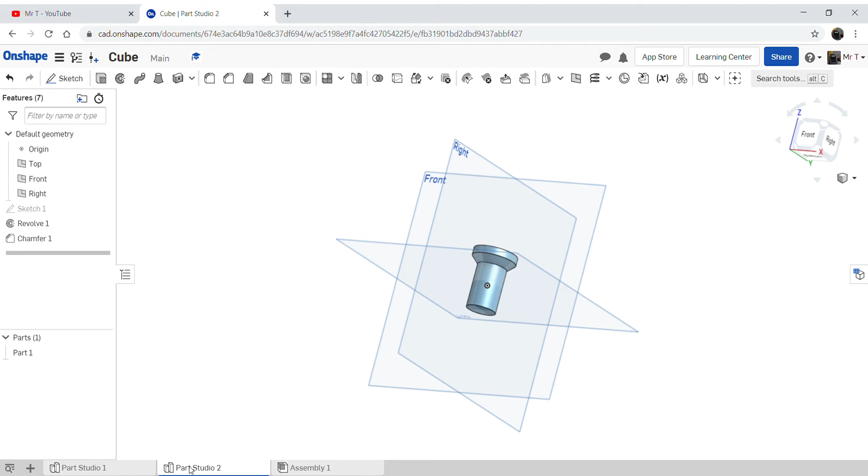So here we are for part 4 of our tutorial to make our slightly weird shape, but nevertheless it's going to be useful in terms of you learning how to put things together. Last time we made our lovely infill section. We started off with a nice sketch. We then revolved it around an axis and then chamfered it to make it look nice and profesh. We've already done our part 1, so we've already seen that, and got our lovely bosses on the side and all that kind of stuff.

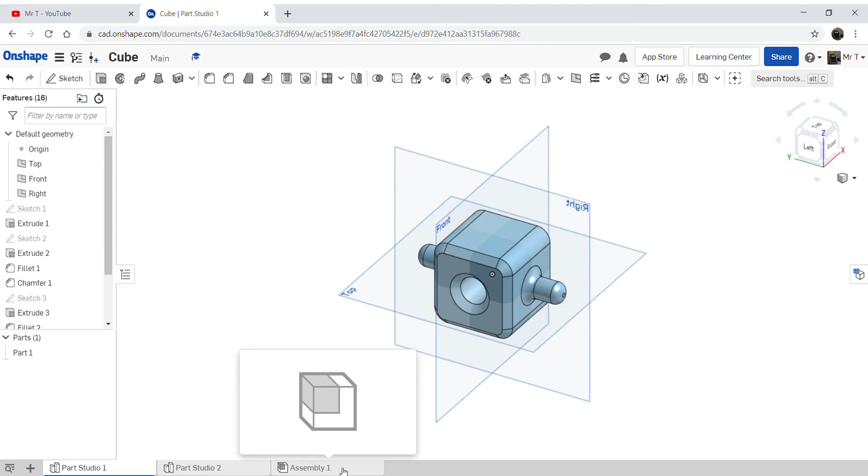Now, we need to combine the two things. Obviously they're in separate part studios at the moment, so that's not very helpful, but that is our drawing and our modelling out of the way, and the last thing we're going to do is to start to assemble those together. So we're going to come down to the bottom where it says assembly 1, and it's creating a new kind of environment for you once again.

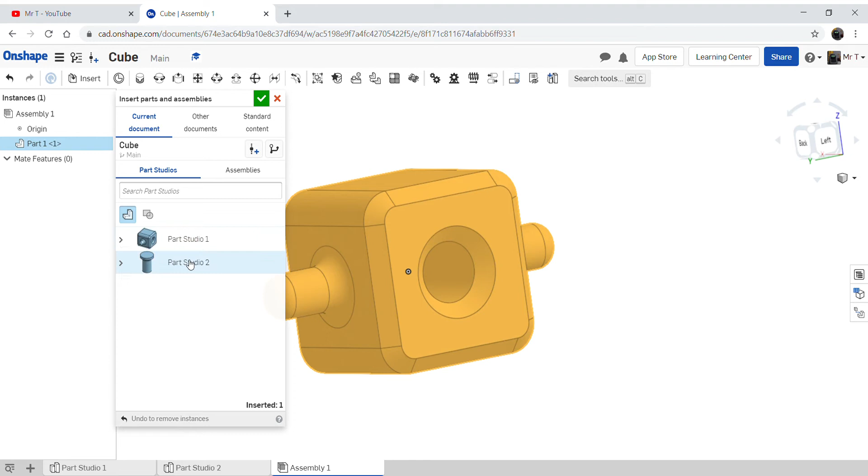Now we need to insert both of those parts, so we're going to go to insert, and we're just going to very quickly click on Part Studio 1. That will bring that in, and then we're going to click on Part Studio 2. Now, because of my insistence for the symmetry and all that kind of stuff, that's made it a little bit weird to insert our two parts into here.

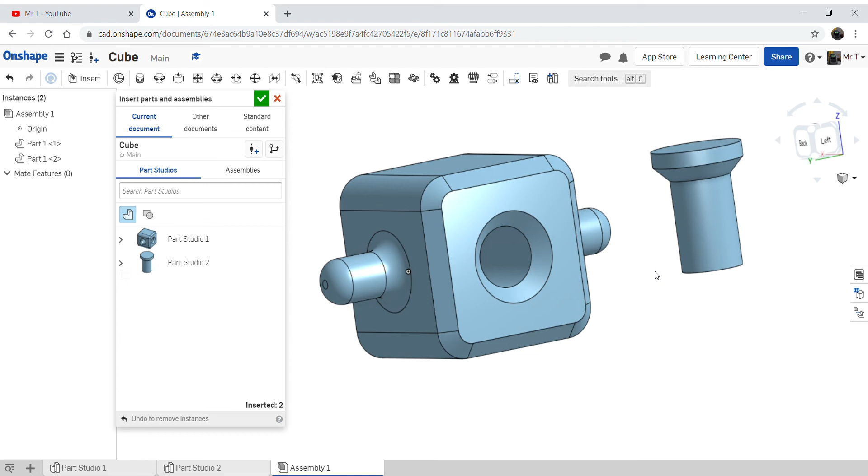Now, if I go around, you can select all the different bits and bobs that we've made, including that particular part. At the moment, that's not in a brilliant place. So what we need to do is actually drag that out of our other shape. Okay, so that gets us like that. The next thing we need to do is start putting them together. So we're just going to accept that we've got the two parts that we want, that part and that part, and then we need to start assembling them.

So to begin with, we're going to use what we call a slider mate. Now these are all mate tools up here, not mates like you're all missing at school, but these are all ways of attaching things, we'll put it that way. Okay, so that's a slider mate. So we're going to select that one. Now what it's going to need to know is what we want to attach to what.

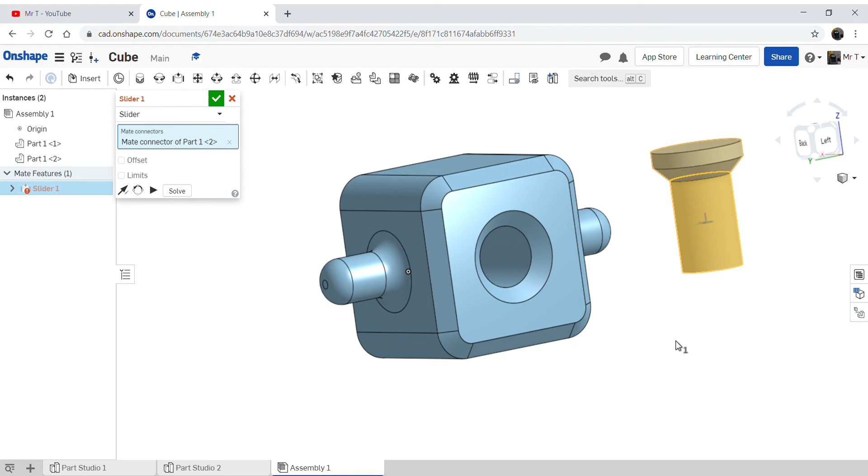Because it's a slider mate, this does not actually join in any way, shape or form. This allows us to be able to move a part around. So if you wanted something to start moving, reciprocating or something like that, you could potentially use this way of doing it. So we're just going to select this bottom cylinder part of it. Okay, so that's got that connected, and then we need to select what we want it to attach to.

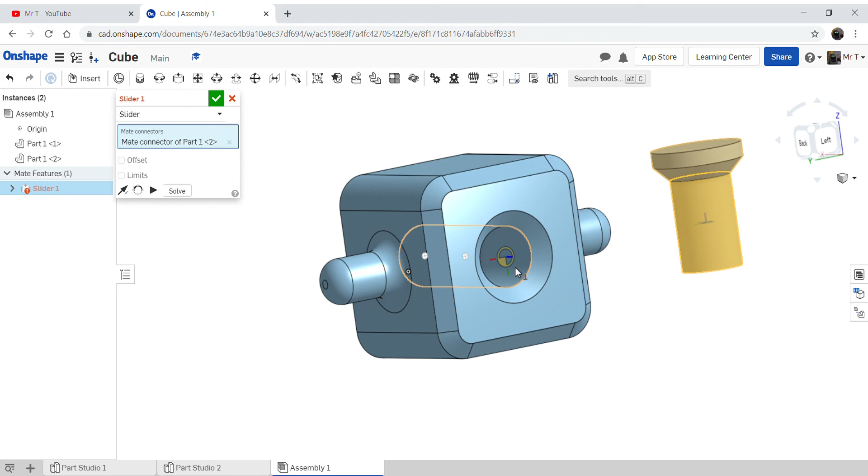So I need to go around, because you saw to begin with it selected this part. This is not right, because that's the bit that attaches to the chamfer. So I need to keep moving around. I might need to come off it and come back onto it, and it's this straight section in the middle that I want it to attach to. So I'm just going to click on that, and straight away that's going to go in there.

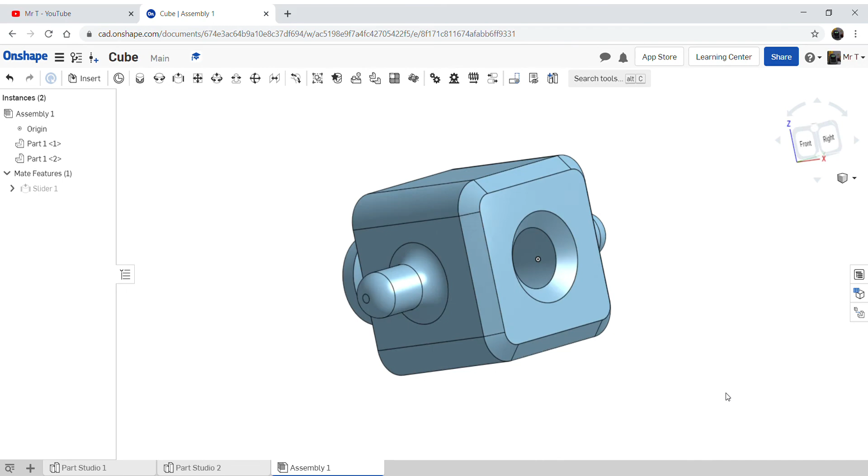Now it's not so sure about it, but I'm just telling it to solve it, so that's going to stay there. I can't OK it or anything like that, so I just need to get rid of that particular feature. Okay, so that now gives us one part that's slid inside the other, hence the mating part. Again, I'll let you make your own jokes.

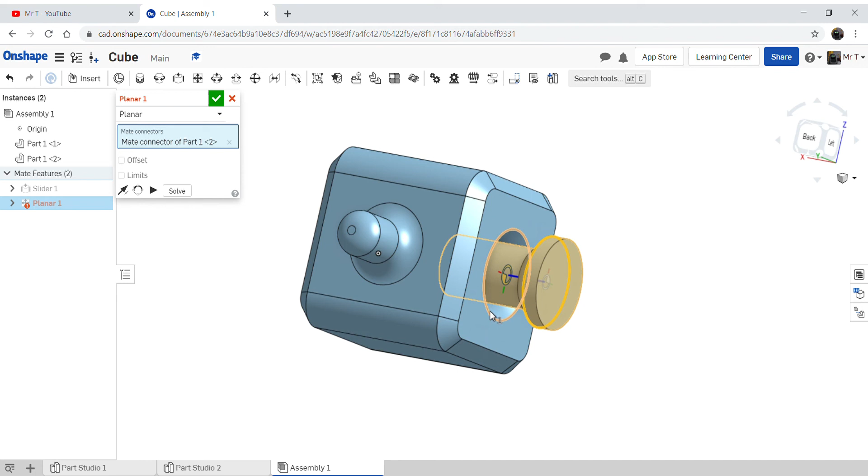And the last thing we want to do is a planar mate, so I'm just going to select that. Then I need to select the two lines that I want to join together. That's essentially what we're doing here. So this is the top edge of the chamfer, and I'm going to select that. And then I'm going to come down to here, and this is the top edge of that chamfer. And if I click the two, thank God that worked, especially when I'm doing a demo. Those two join together, and again I can't do anything with those because they've just been put together.

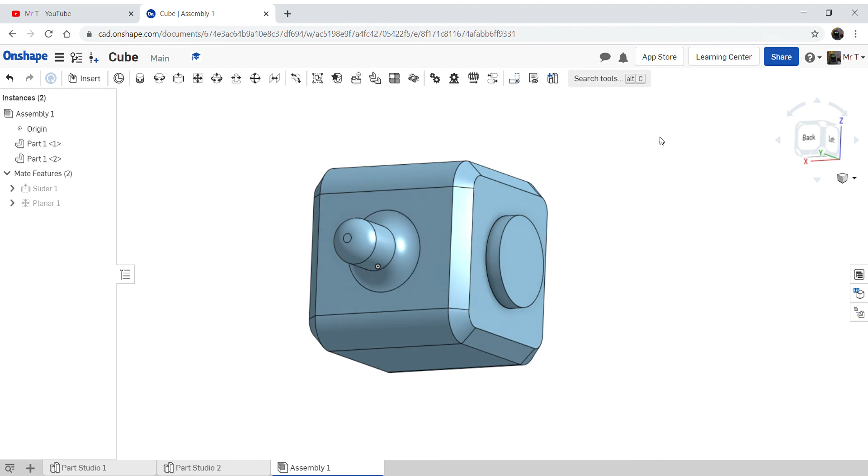So that is where we should end up. You can see from the other side, that's slid inside there, and that is nicely pushed down into that section quite nicely. Excuse me. So that is everything that we needed to do with this particular offering. I seem to have turned it up a very strange way, so I'll just put it back to where I'd like it to be, to show you what it should end up like. So that is our part 4, and those are our assembled parts.

If you can get yourselves to that stage, that is absolutely fantastic. So congratulations, you've learned how to make things, how to create new part studios, how to chamfer edges, how to create bosses and remove material, and you've learned how to create an assembly and put things together as well. So well done if you've got to that stage.